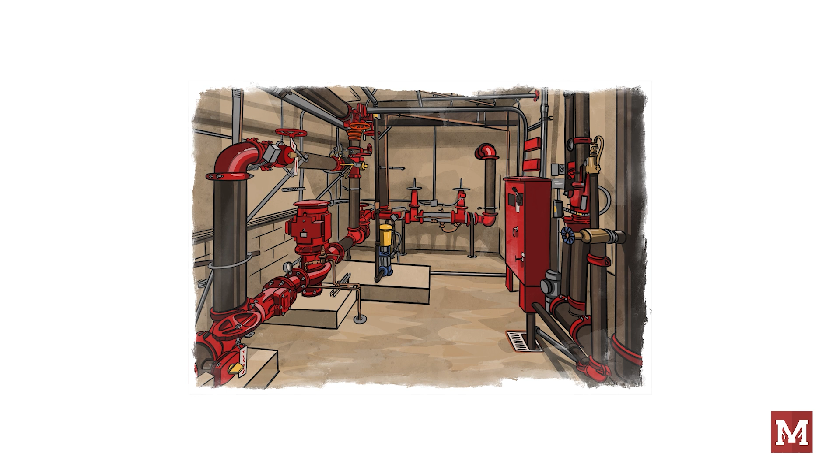There are several components to a fire pump system. Each is necessary for the fire pump to function as intended. The pump appliance itself, the powered drive component, the jockey or pressure maintenance pump, the fire pump controller, and the

jockey pump controller are all critical components of the system as a whole. In this segment, we're going to discuss the actual fire pump appliance itself. In later segments, we'll identify each of the other components and discuss their function and contribution to the aggregate system.

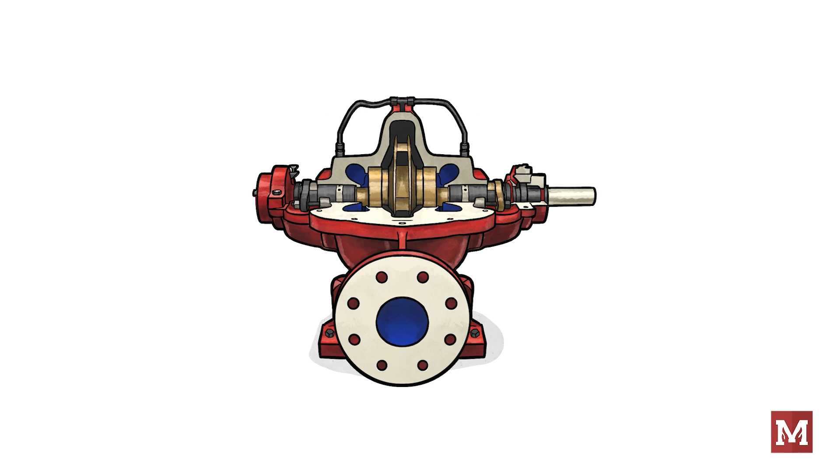The fire pump itself is relatively simple. Regardless of the type of pump used, the concept is basically the same. The pump is equipped with an impeller, which is located within the fire pump's housing.

As the impeller turns, water flings to the outer walls of the pump housing, which in turn places force into the mass. This force of mass in turn creates pressure and velocity. Velocity is the movement of the water.

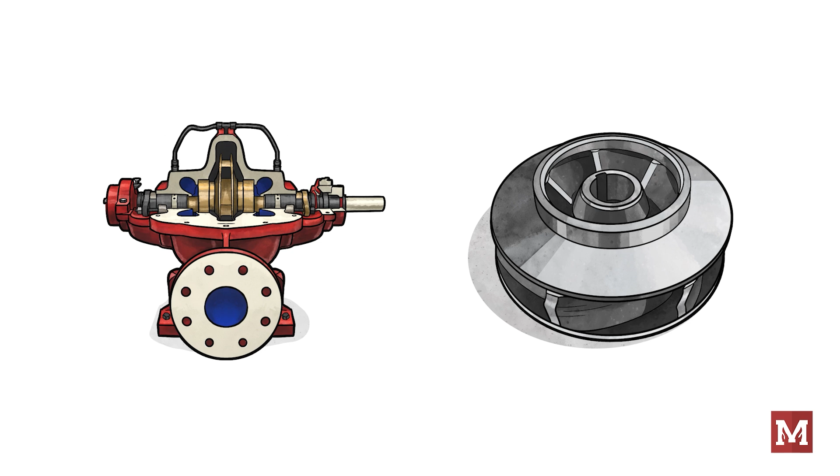The fire pump controller sits in a large metal cabinet in the pump room and serves as the brain of the system. Typically, when a fire pump is installed, sensing lines are installed from the discharge side of the pump and then connected to the fire pump controller.

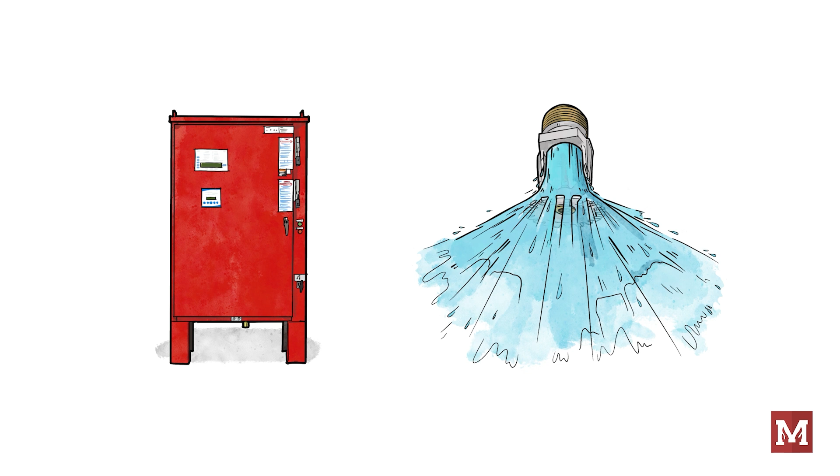We'll discuss this in greater detail in later segments, but for now, it's important to know that when the fire pump controller senses a predetermined drop in pressure on the system side, it pretty much presumes that water is flowing somewhere in the building and the fire pump is needed to provide adequate pressure.

The fire pump controller then tells the drive component to start, thus turning the impeller in the pump, which does its thing. The motion of the impeller then creates the pressure and velocity, or movement, of the water into the automatic sprinkler, standpipe, or water mist system.

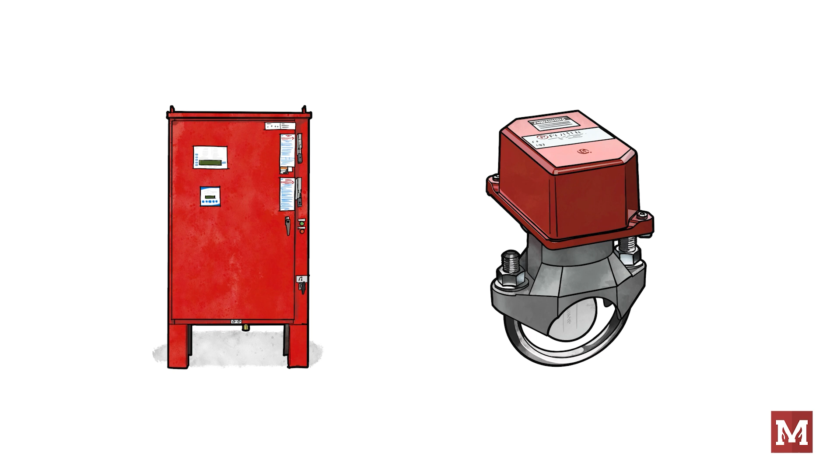We should note that although pressure drop is generally the most common method the fire pump controller uses to tell the fire pump when to start, alternatively, the controller may use a water flow condition as identified by a flow switch.

Either way, the controller is directing the drive component to do its thing and power the pump. Additionally, it's important to remember that once a fire pump starts, it must be shut down manually. No automatic shutdown is permitted.

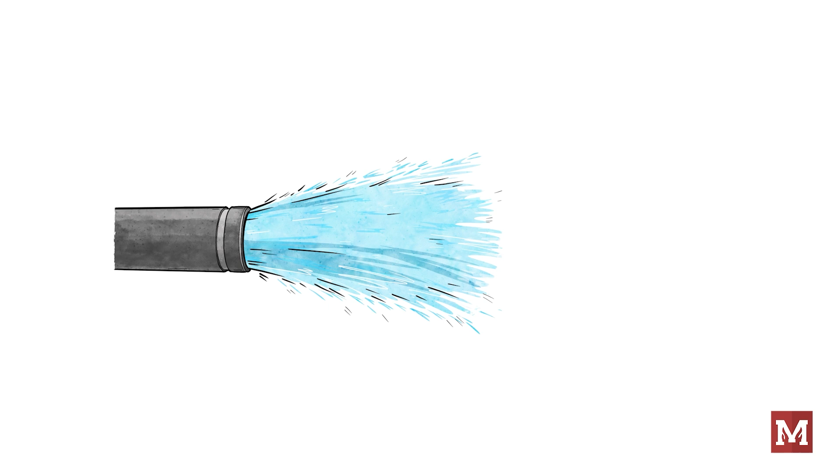It's not some sort of dark magic as to how the impeller does its job. It's just science. If we were to look at an impeller, we would see that it has what could be described as blades. As the impeller turns, the liquid is radially pushed outward in all directions to the edge of the impeller.

As the liquid is pushed outward, this creates an area of lower pressure toward the center of the impeller. You've probably heard it said that nature abhors a vacuum, and that's true.

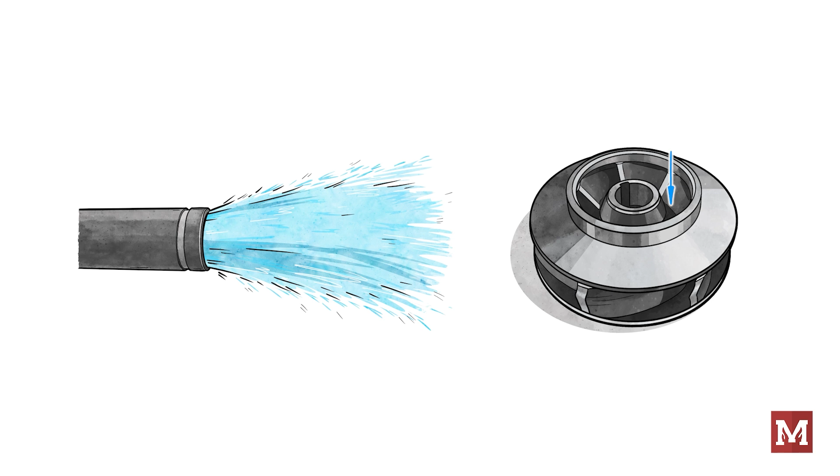This area of lower pressure near the center of the impeller pulls more liquid into the intake of the pump. The liquid continues to get trapped between the blades, or vanes, of the impeller. As the impeller continues to rotate, it creates velocity, or movement, of the water, creating kinetic energy as it reaches the outer edge of the impeller.

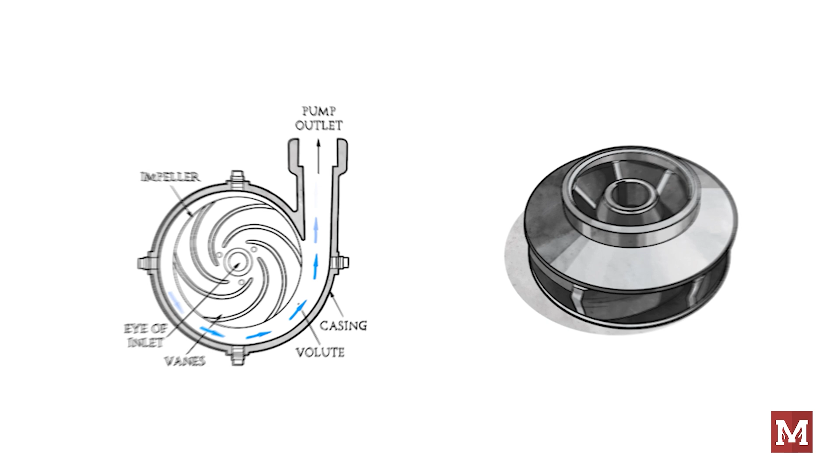By the time the liquid reaches the outer edge of the impeller, it's moving at a higher velocity. The liquid exits the impeller and impacts the pump casing, where the kinetic energy we just identified converts to potential energy, or pressure.

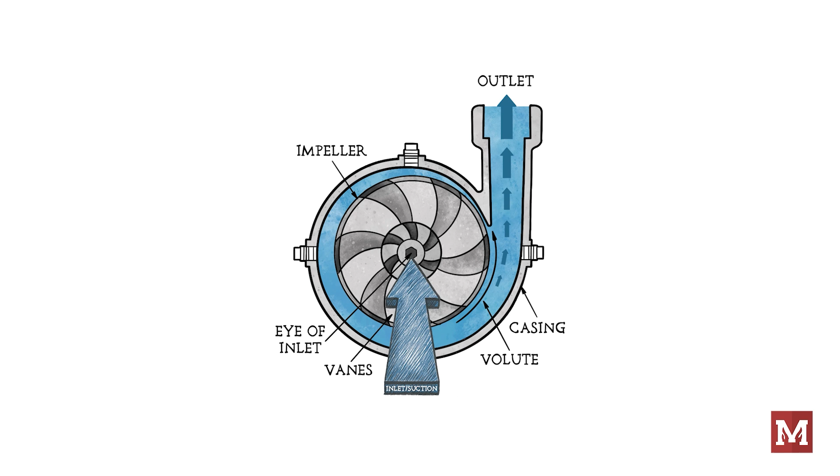As this continues to happen, more liquid follows behind, and this process generates the rate of flow. The fire pump has a device called a volute channel downstream of the impeller. This volute channel resembles sort of a curved funnel.

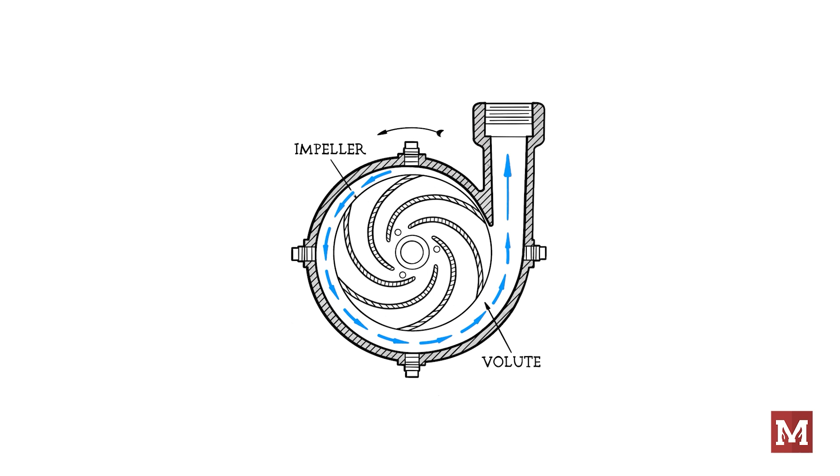This funnel increases in diameter as it approaches the pump discharge flange. As the liquid passes through the expanding diameter of the volute channel, the velocity of the water decreases. This is because the liquid has a little more physical room in the area.

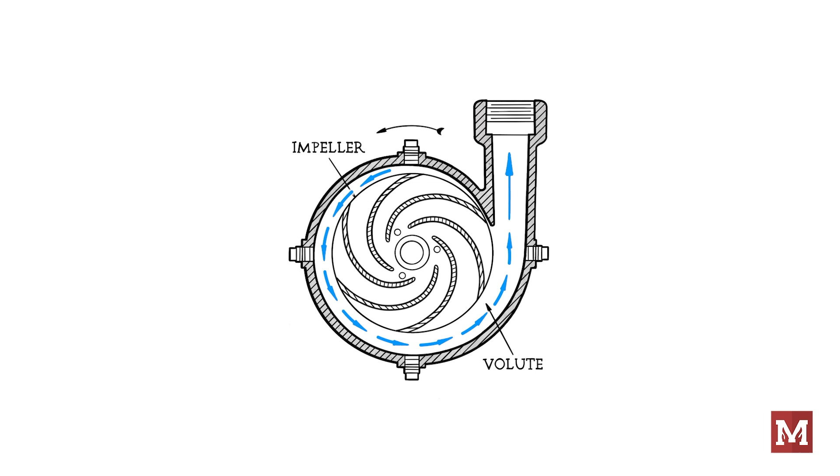This action of the decreasing velocity of the liquid causes the potential energy, or pressure, to increase. The liquid then exits through the discharge flange at a much higher pressure than entered through the intake flange.

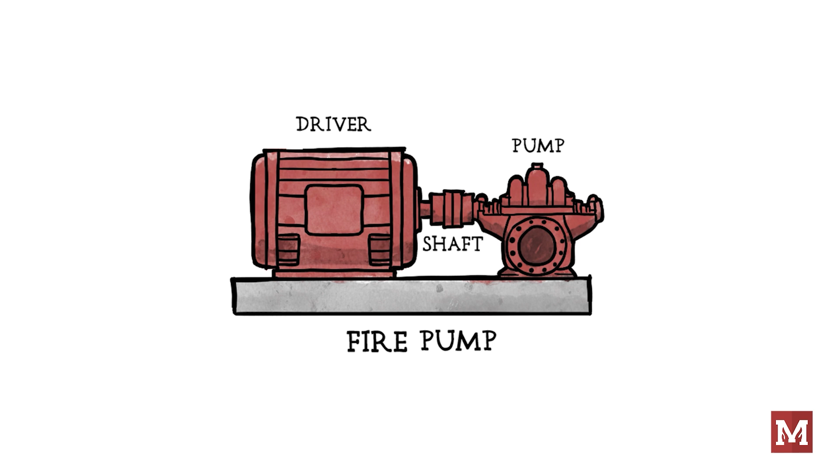Electric drive is one of the 3 drive means NFPA 20 allows for a fire pump. We'll discuss the other allowable drive means in a later segment, but electric drive is often preferable. There's less maintenance involved, they're cheaper, etc.

However, electric drive motors for fire pumps need to be supplied with 3-phase electrical service. If 3-phase electrical service is not available at the project location, you won't be able to use an electric drive motor, and using a vertical inline pump is not an option. You'll have to look at other pump types.

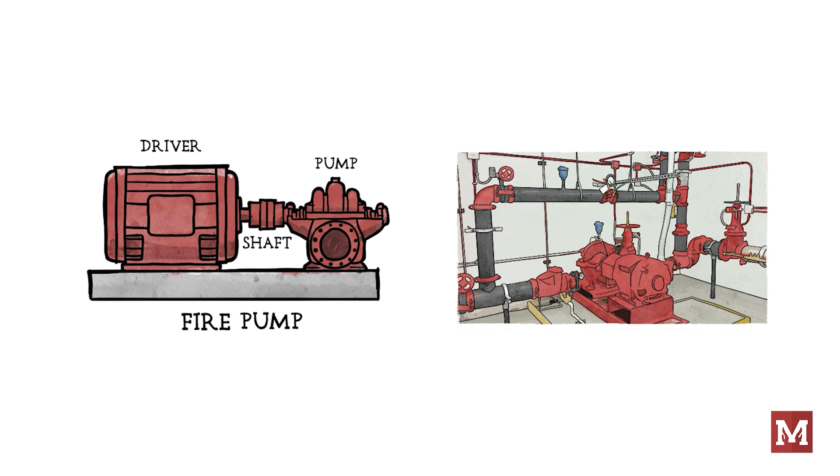In this segment, we explored the mechanics behind how a fire pump generates movement and pressure of the liquid. The fire pump creates movement of the water, which then generates pressure.